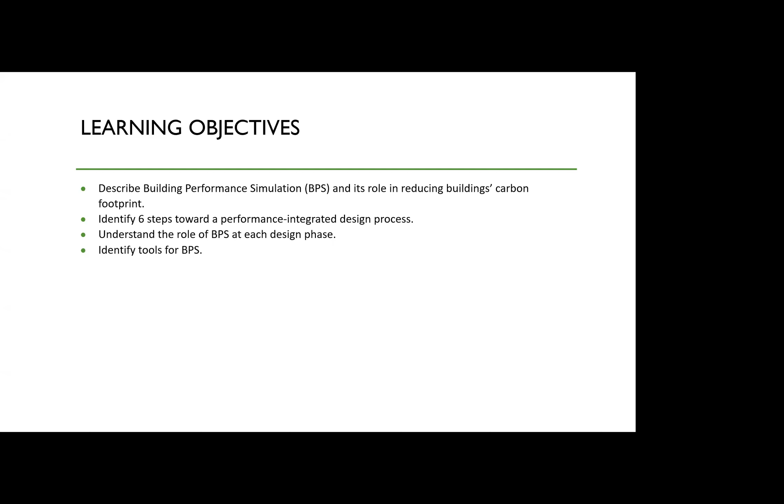Today's topic is about building performance simulation, and the learning objectives of this presentation is for the audience to be able to describe building performance simulation and its role in reducing buildings' carbon footprint. The audience at the end of this presentation will be able to identify 6 steps towards a performance integrated design process, understand the role of building performance simulation at each design phase, and identify tools for analysis.

So if everybody had a chance to answer the questionnaire, I would like to see the results. Laura, can you share the results with us? So we have 26% architects, 4% developers, and mostly we have energy analysts here, and also mechanical engineers, and some sustainability coordinators, and also from other professions. So I will try to speak somehow that it's digestible and understandable by all of our audience.

So let me start with talking about climate change. Climate change is one of the biggest issues of our days. Burning fossil fuel for energy releases CO2 into the atmosphere, trapping heat, raising the temperature of the planet, and causing massive changes to the climate and ecosystems. Buildings are responsible for about 40% of global CO2 emissions, which is the big chunk of the pie when you look at the global CO2 emissions.

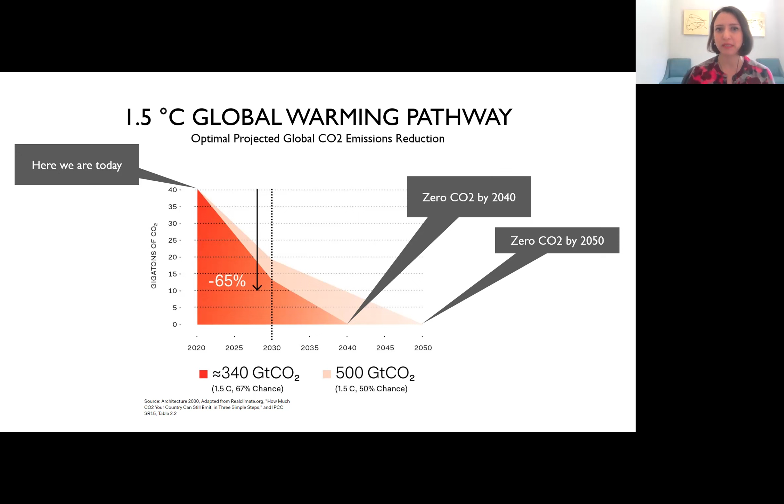So it is time for architects and design teams to take action. Architecture 2030 is a nonprofit organization that defined the 2030 challenge. This challenge requires architects to commit to reach carbon neutrality by 2030. And what that means is reducing fossil fuel energy use in all buildings, and then generating the remaining energy consumption and energy need of the buildings through renewable sources such as PV panels.

So let's talk about what goes wrong in architectural design and architectural practice that prevents designers from reaching carbon neutrality. There could be so many items and issues in the complex task of architectural design, like only focusing on the client's needs, forgetting about future generations, ignoring life cycle analysis, and focusing only on first cost, or just feeling disempowered. However, today I only want to focus on the design process.

The design process that does not include building performance analysis. So what is building performance analysis and simulation, basically? It is a set of computer-generated calculations that help designers compare design options and predict anticipated energy consumption of a building and its systems. It increases the ability to make informed decisions to improve energy performance and increase thermal and visual comfort, among all other design issues.

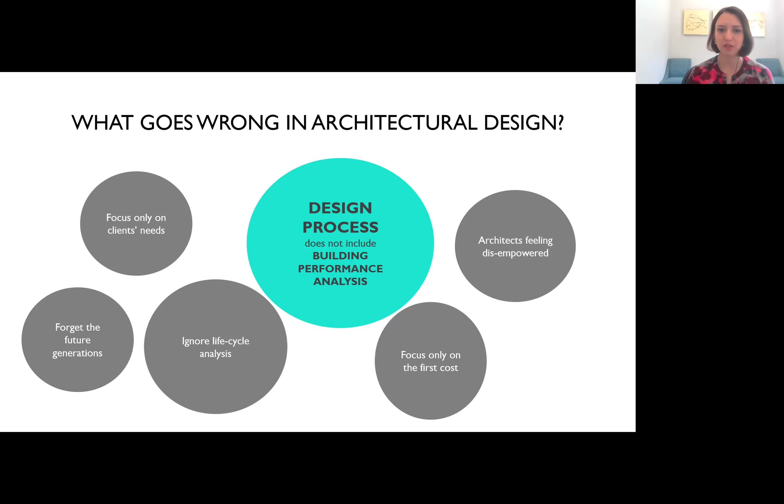Now, let's look at an integrated design approach where building performance simulation and analysis takes place along with the design phases, starting from conceptual design until schematic design, design development, construction administration, and occupancy. So this is an integrated approach where building performance simulation and analysis takes place at each phase.

When we start at early stages of design, we most of the time do some single aspect simulations. And as the design gets more evolved, we perform whole building energy modeling. The whole building energy modeling could start like a shoebox model, a simple, very simple box model. It can start at very early stages of schematic design.

So let's see what happens at each of these phases. Early investigation means setting goals, setting energy reduction goals, understanding the local energy codes, realizing what the requirements are, finding out about any possible incentives that you have locally. And also doing environmental analysis like climate and site analysis, massing and orientation, natural ventilation, solar shading, daylight glare, and envelope facade.

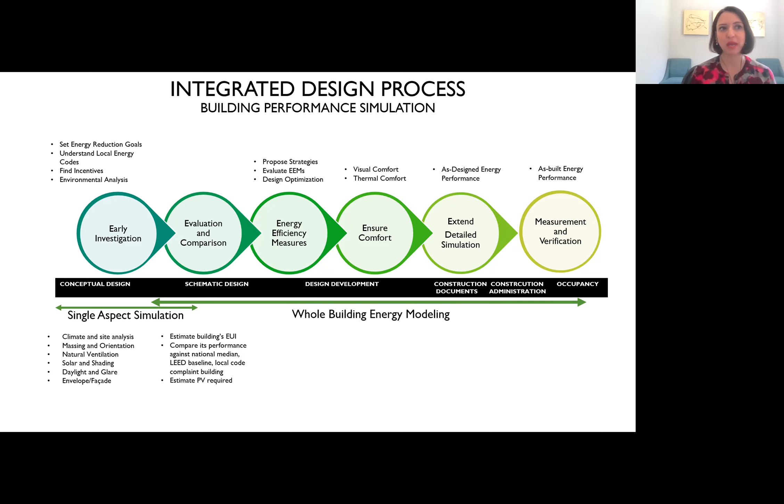However, in a typical design practice, this is what is happening. Rather than the integrated process, we do some kind of early investigation, early stage simulations, which are mostly done by the architect. We forget about building performance. We never talk about that with the design team.

And then we realize that we need compliance modeling, mostly for LEED or for code compliance, at the very later design phases, towards design development or construction documents. That is where the mechanical engineer or energy analyst gets involved. All the drawings are sent to him or her, and he or she is asked to create an energy model.

But we shouldn't forget that compliance modeling is not supposed to be predictive, is not supposed to be precise, to provide feedback for the designer. It is just showing that a minimum level of performance is achieved.

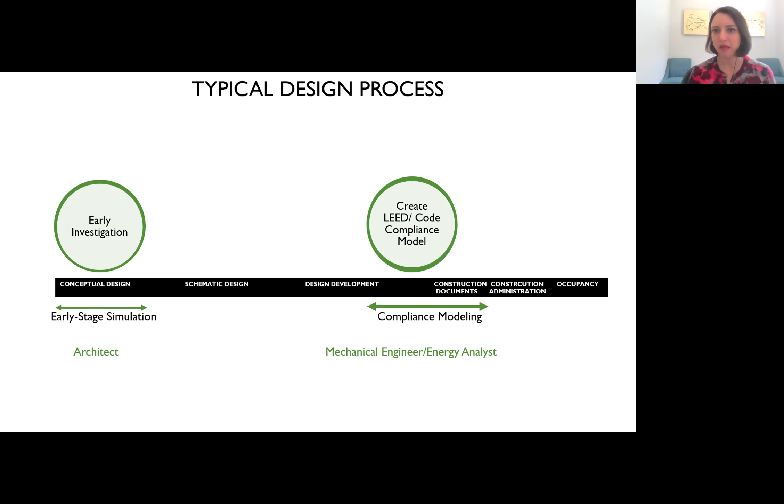So what's the problem with that? The problem with the typical practice is that we create a whole building energy model very late at the design phase, when it is too late to provide enough feedback, when it is too late to guide the design team.

So as you see in this graph, the yellow line shows effectiveness, and the dark blue line shows cost. At the beginning, we have high impact, low cost decisions. Making changes is easy, they don't cost much. However, at the later design phases, after design development and construction documents, any single change you want to make is costly. You have to change all the drawings, coordinate with all the disciplines, and it's super costly. So it's too late to make any changes.

So this practice means missed serious opportunities to reduce first costs, reduce operational costs, and reduce environmental impacts.

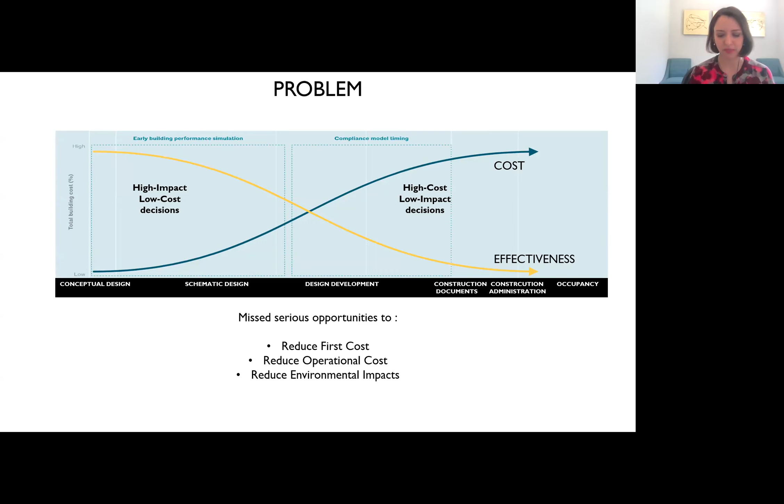Now I want to talk about analysis tools. The tools I am presenting, not all of them but most of them, are early stage analysis tools and whole building energy modeling tools.

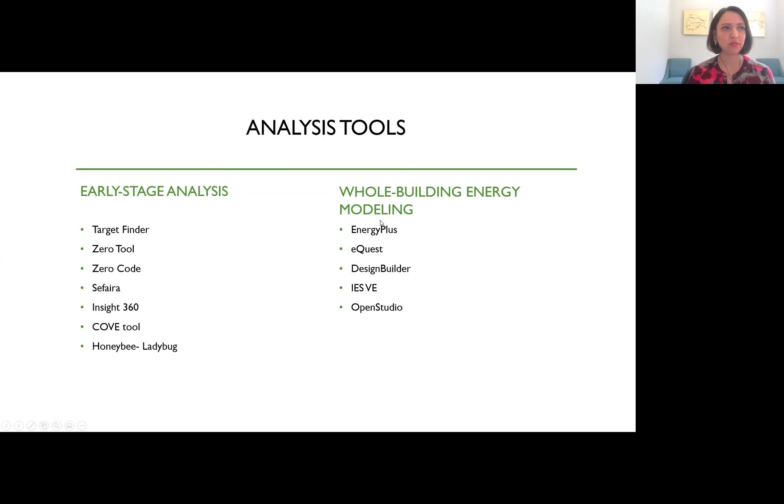Let's get started. Target Finder is very easy to use. It just needs to know the location of the building and the type of building. Then it will generate the EUI, energy use intensity, of a median commercial building in the US, showing you what the EUI is for a similar building with similar functionality to yours. So it's very good to set a target for the design.

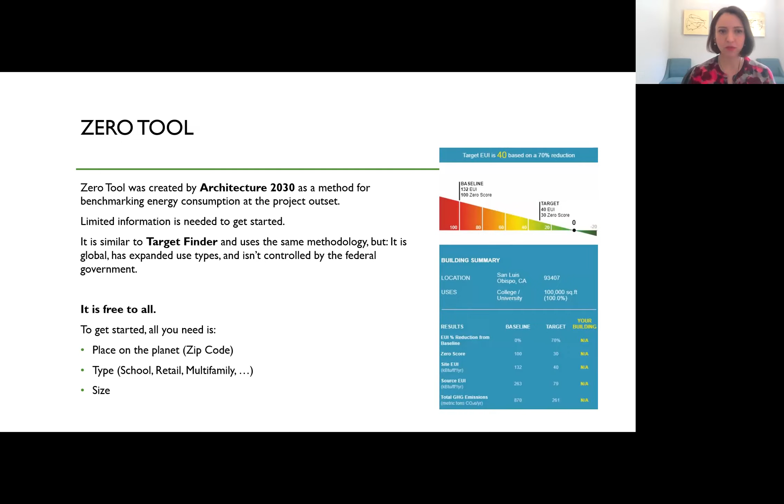Zero Tool is created by Architecture 2030. It's very similar to Target Finder. The only difference is it's global, so it's not limited to the US. It has expanded use types, with different building use types introduced in the tool, and it's not controlled by the federal government. You need the same information: just the zip code, the building type, and the size of the building.

The next one is Sefaira. It's a web-based, real-time early design analysis tool that integrates best with SketchUp, although it works with other software packages. It's very useful to look at different alternatives like the impact of orientation, facade, window-to-wall ratio, and shading on the design. Daylighting analysis is simple, and Sefaira also allows you to pick some mechanical systems.

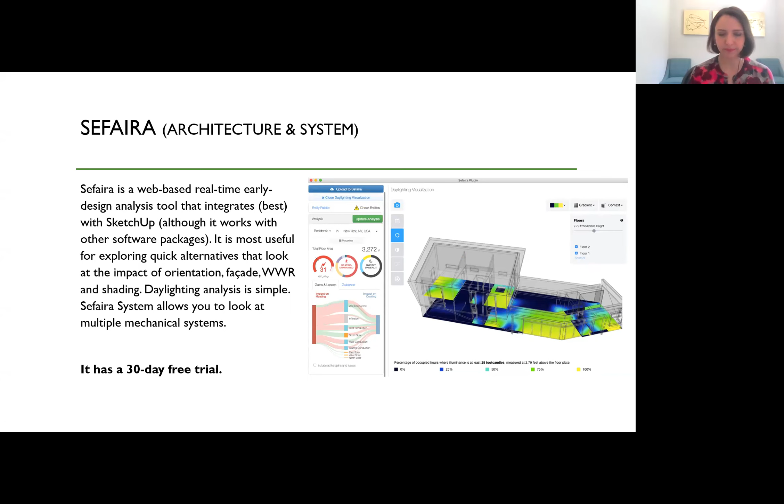Insight 360 is a cloud-based application for Revit, and it's free for Revit users. It's most useful for finding a building's approximate EUI, and looking at the impact of orientation, facade, window construction types, window-to-wall ratio, and shading. Users have a list of options to pick from, so you should pick the options wisely to get an approximately accurate result.

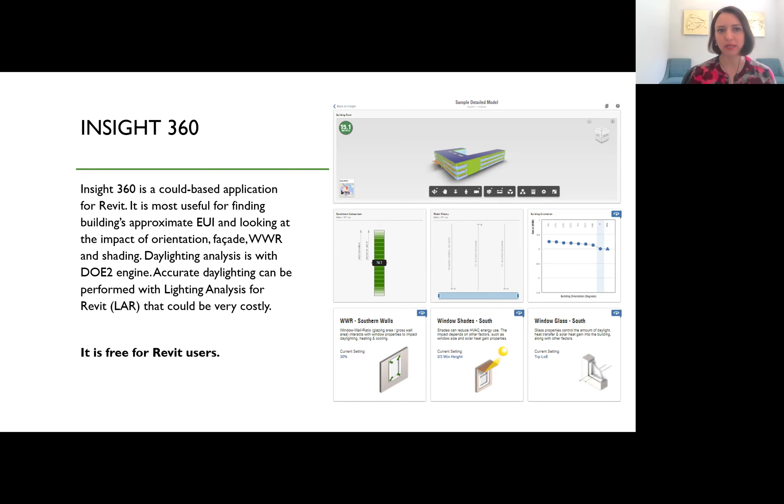Daylighting is not very highly accurate because it uses the DOE2 engine, but for doing more complicated, more advanced lighting, you can do it with LAR, lighting analysis for Revit, which could be very costly.

The next one is Cove Tool. It's again web-based and real-time, and it works with Rhino, Revit, and SketchUp. It has a wider range of performance analysis, including target setting, load profile analysis, and daylighting. It also has views and water analysis, which aren't found in the other tools, as well as energy analysis. They also added a COVID design feature, based on keeping a 6 feet apart distance, a neat thing that's useful too.

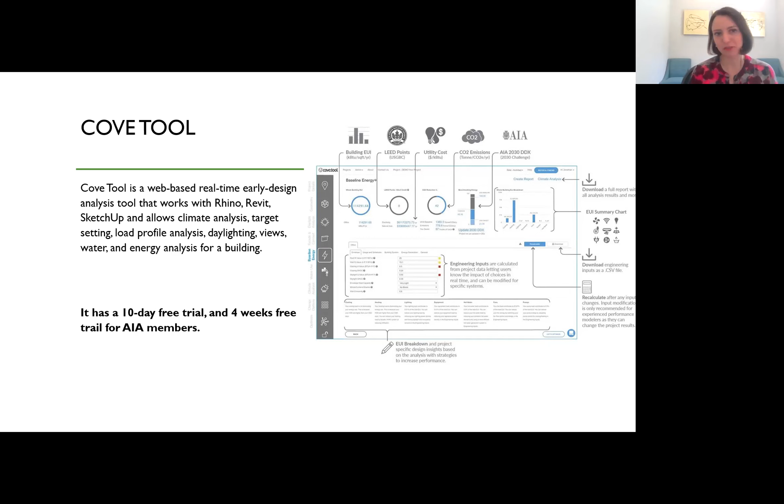Ladybug Honeybee tools are my personal favorite for doing early stage analysis, because of their flexibility and the possibility for the user to adjust, maneuver, and change parameters to see what is actually going on in the program. It comes in the format of Rhino plugins, and the tool is also developed for Dynamo for Revit, but it was originally created for Grasshopper and Rhino. It uses two very strong, powerful engines: Radiance for daylighting and Energy Plus for energy modeling. It's capable of doing many different kinds of environmental analysis, and it's free.

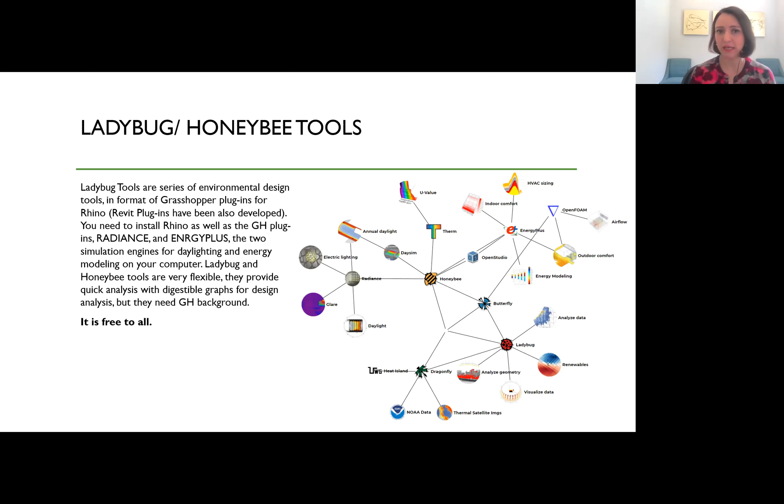Energy Plus is the DOE's fundamental energy simulation tool that has been funded, and it continues to get funding for development of capabilities. Energy Plus is not very user-friendly, and it has originally been used by researchers.

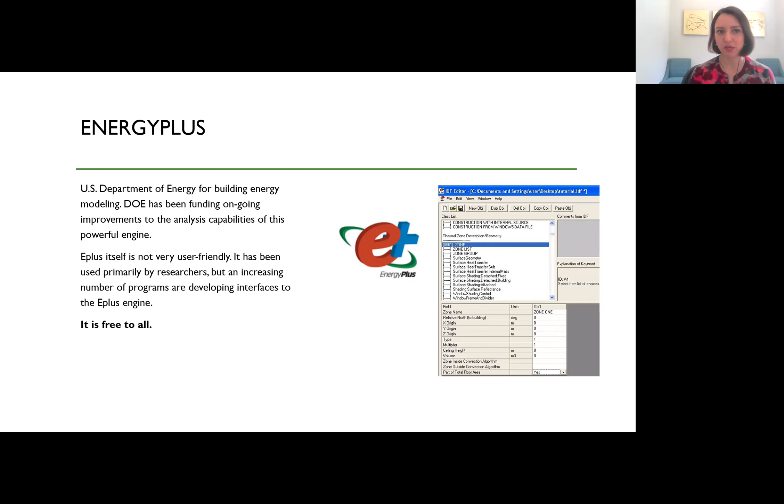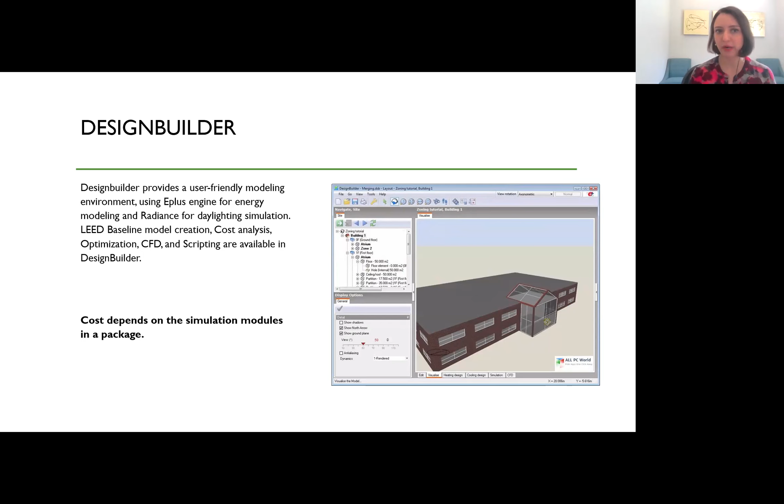But an increasing number of programs are developing interfaces to the E+ engine. One example is Design Builder, a very user-friendly modeling environment that uses the Energy Plus engine. It also does daylighting simulation with Radiance, creates the LEED baseline model, and does cost analysis, optimization, CFD, and scripting. The price depends on the number and type of modules that you purchase.

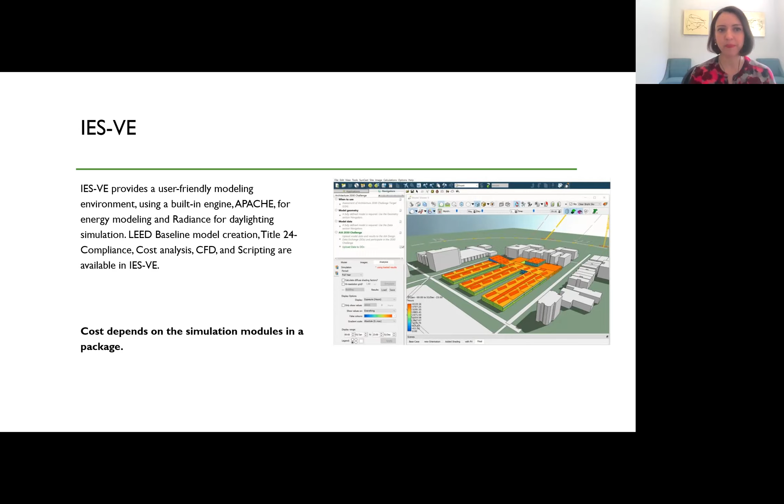IES is relatively similar to Design Builder in terms of its function. It provides very advanced whole building energy modeling, using its own built-in engine, Apache, for energy modeling, and Radiance for daylighting. It also creates the baseline model and Title 24 compliance, which Design Builder doesn't do. It also has cost analysis, CFD, and scripting, and it is relatively pricey, with the price depending on the modules that you want to use.

So now I would like to have a brain break and ask you some questions. I want to know if you have used any of the tools that we discussed, and a few more that I didn't elaborate on here, and whether any of these tools have worked well for you.

Please respond to the poll. We have three questions here. The first one is about the tools. The second question is, do you use any other tools for building performance analysis? If so, let me know what other tools you use and are happy and satisfied with.

The next question is, do you support the integrated design process? Strongly agree, somewhat agree, strongly disagree. If you want to provide more explanation, please use the chat box, because I really want to know what you think about this integrated design approach. I also wanted an open-ended question to know what you think is an impediment to reaching that integrated design approach, but I'll read the chat box later once you've all responded.

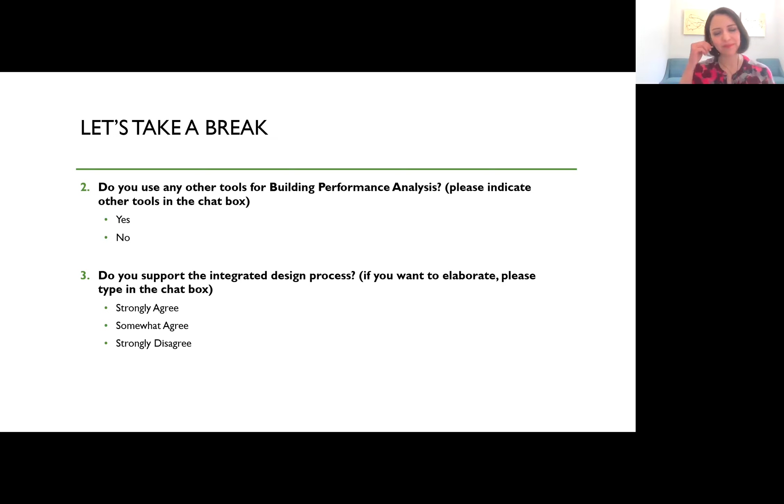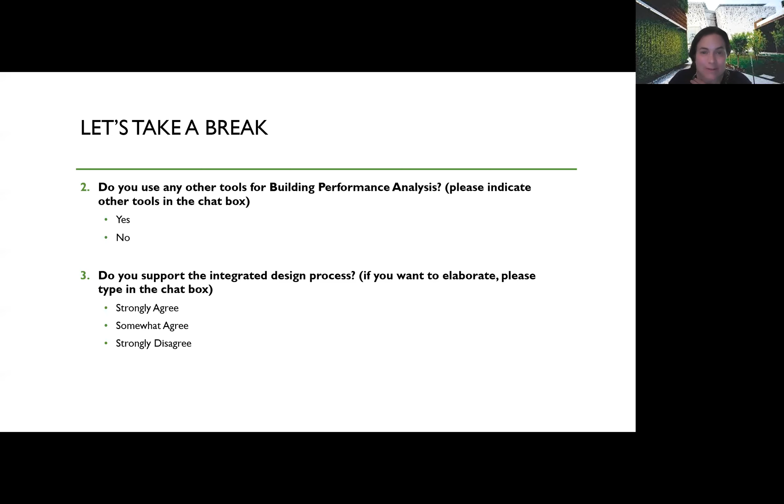Somebody mentioned in the chat that you forgot IES, but there were only a certain amount of potential answers, so that was the last one on the list and it didn't fit in. If you use that, please share in the chat. Oh, in the poll? Oh, I got it. Sorry about that. Oh, no problem, the limits of technology. If you have not finished it, go ahead and finish so we can launch and get an idea of how many people use which tools.

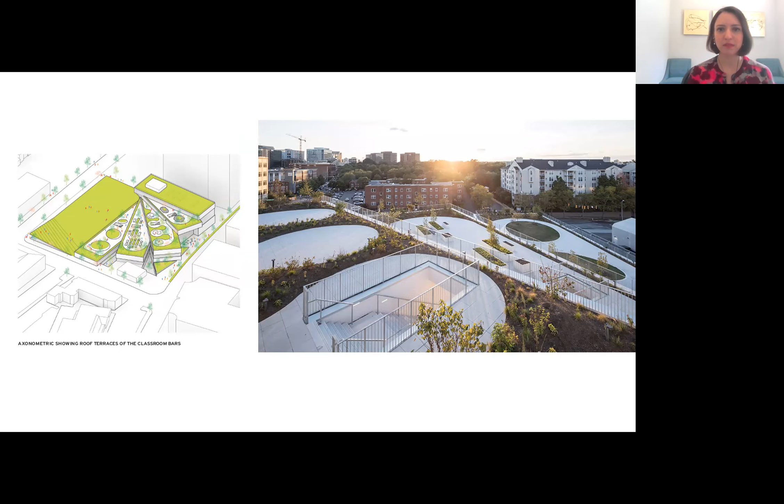The very first stage of the design was massing study, and the architect was thinking about all the different massing options that could possibly be created. They wanted to know the energy consumption impact of different massing options. So what I did was summarize and categorize the many options they gave me into 16 categories, and create some prototypes and simple configurations to represent a group of the options presented to me.

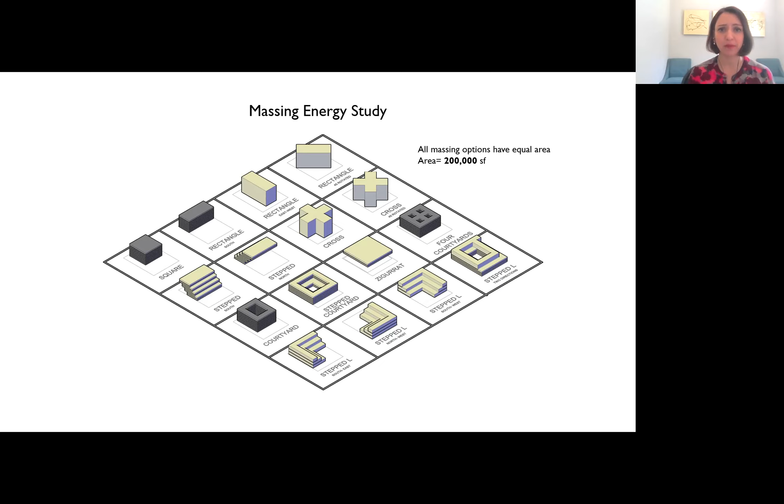The criteria I had for creating all these options was to keep the area at 200,000 square foot. So I created an energy model for each of these 16 options to understand the heat gains and heat losses for each. As you see here, different configurations have different heat losses and heat gains.

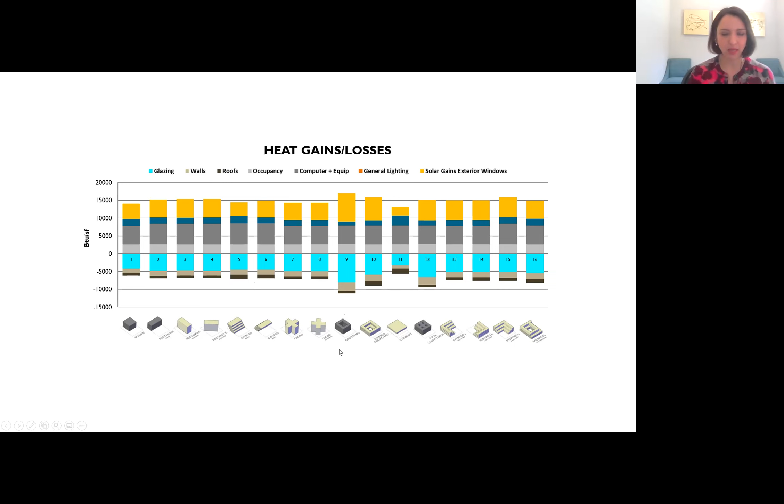The other aspect I looked at was energy consumption—heating, cooling, and lighting energy—only looking at those three categories to see which options use less energy. The most efficient design was a simple square building and a simple rectangular building. But neither the architect nor the client were interested in those simple options. They just wanted to build something unique and amazing.

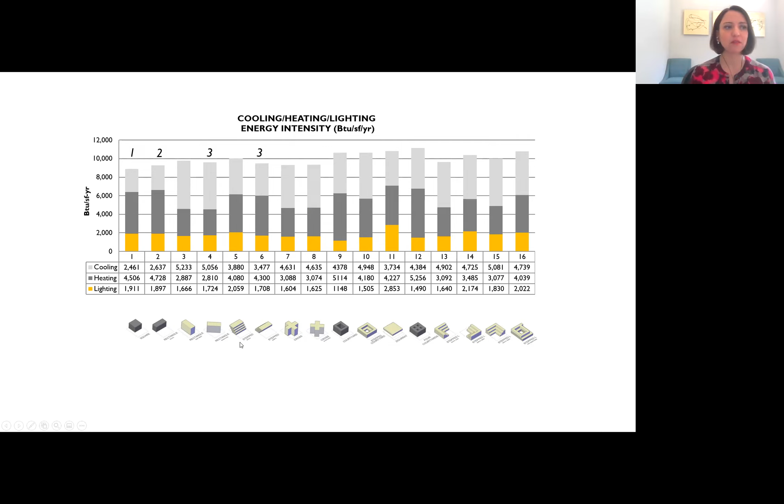So the third option was the stepped rectangular floor plates towards south and towards southeast, and that was the beginning of the time they started thinking about those stack of buildings.

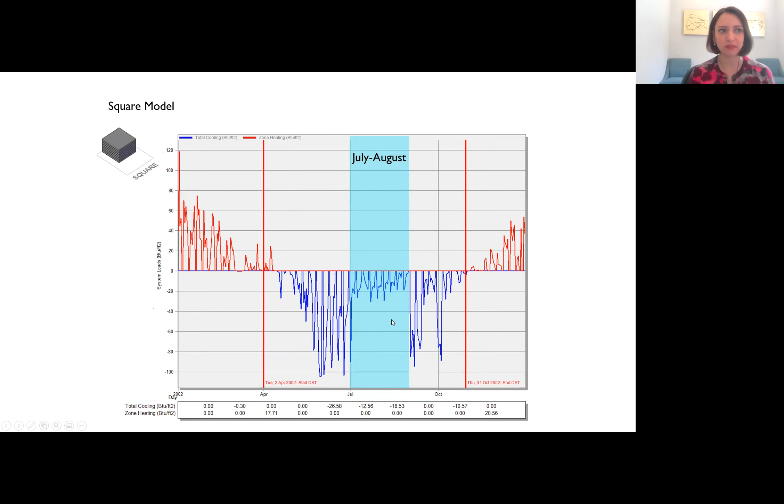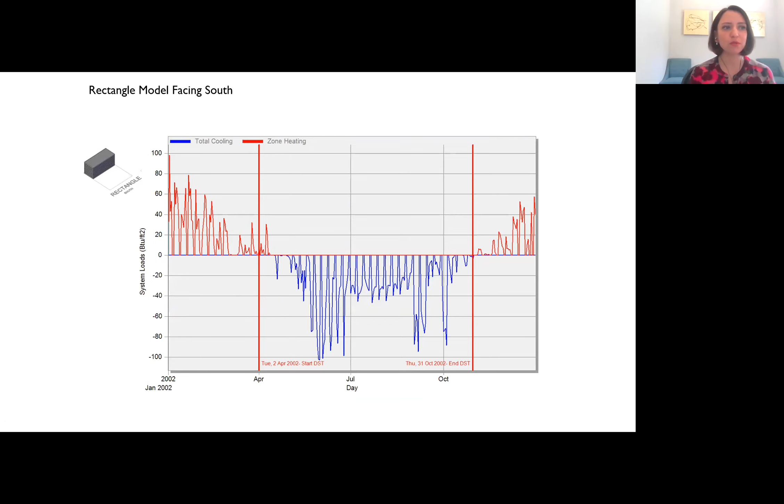At the same time, I was looking at the annual profile to see when heating and cooling energy is consumed, and I paid attention to the summer closure of the school. In summertime, the building is not occupied, so it doesn't have a lot of cooling energy—just thinking about how the loads look like at every single day in a year.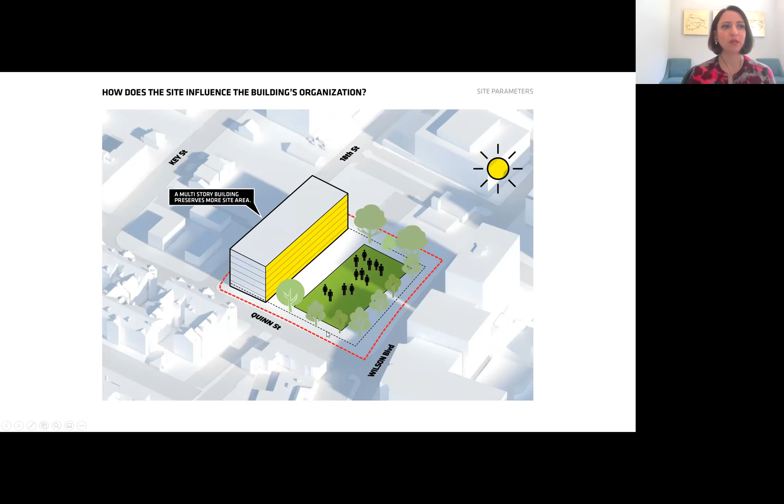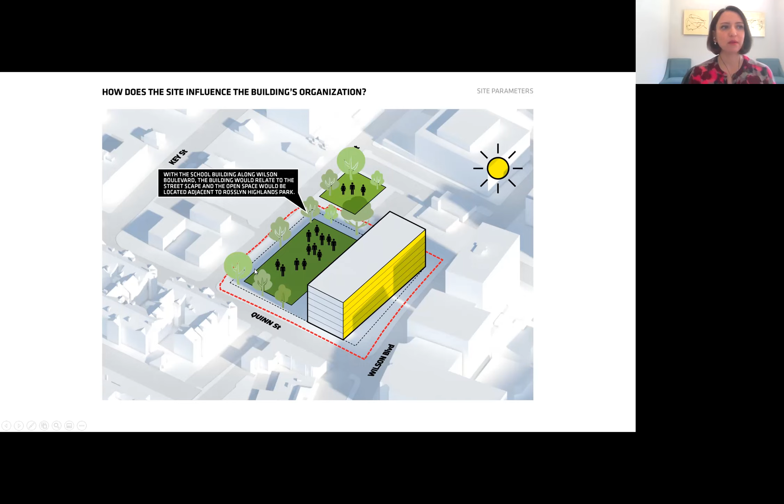If the building is located at the back of the site, they would have an open space for the students to enjoy more open area. If the building was located on Wilson Boulevard, they would have more enclosed space, quieter space, more enclosure.

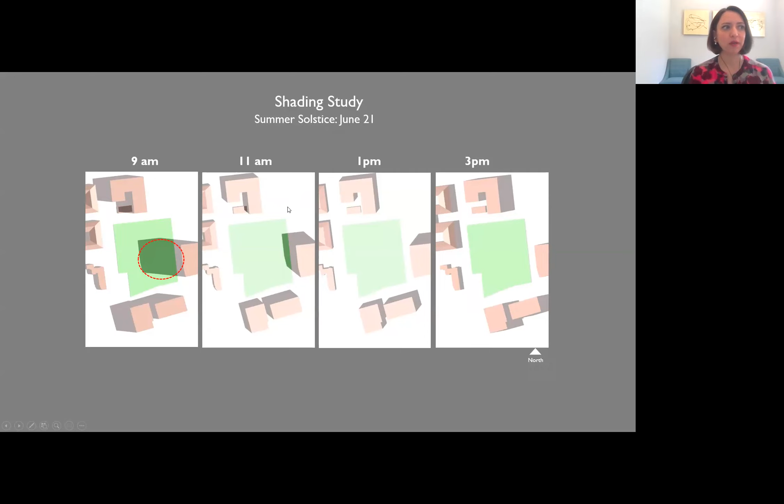What I provided for them was shading analysis to look at three time steps: summer solstice, equinox, and winter solstice, at 9 a.m., 11 a.m., 1 p.m., and 3 p.m., since the school operation is mostly in the morning. So what the shading analysis showed was that...

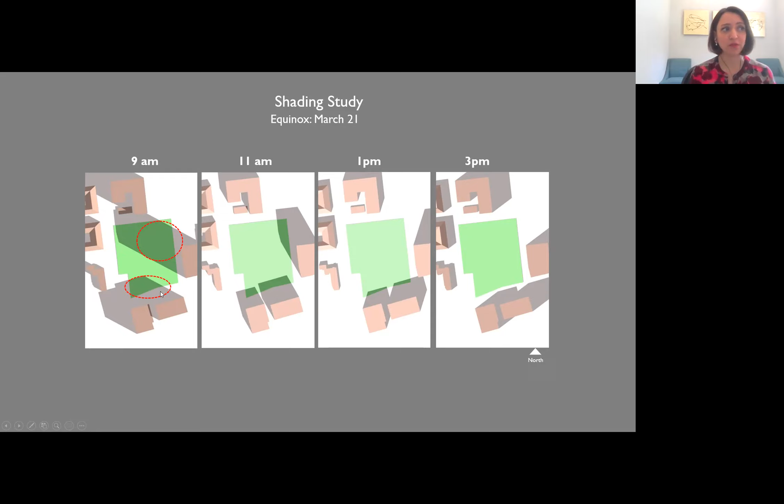The site was mostly shaded by the neighboring buildings because they had two tall buildings in the south and one on the east that was casting shade during the morning hours, which is when the kids are mostly in school.

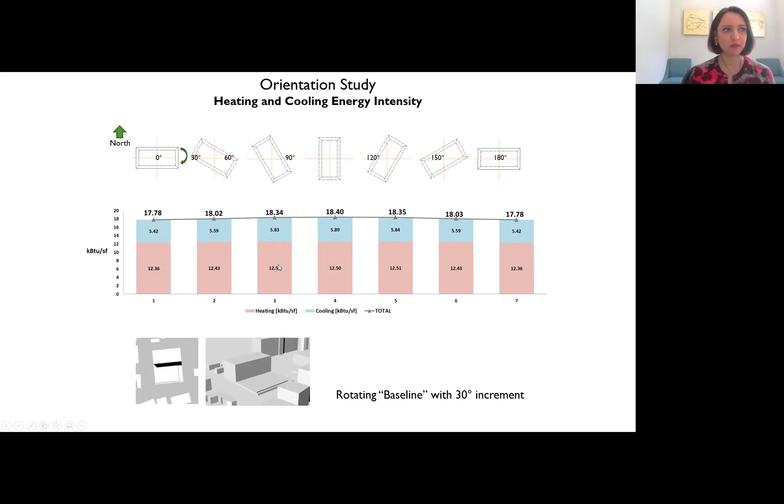The other part was orientation study—trying to rotate the building by 30 degrees and finding out the energy consumption. If you look at this graph, you might say there is less implication on the total EUI, but if we zoom in, there's about 1 EUI difference when we have the building in the optimized position, which is north-south to east-west.

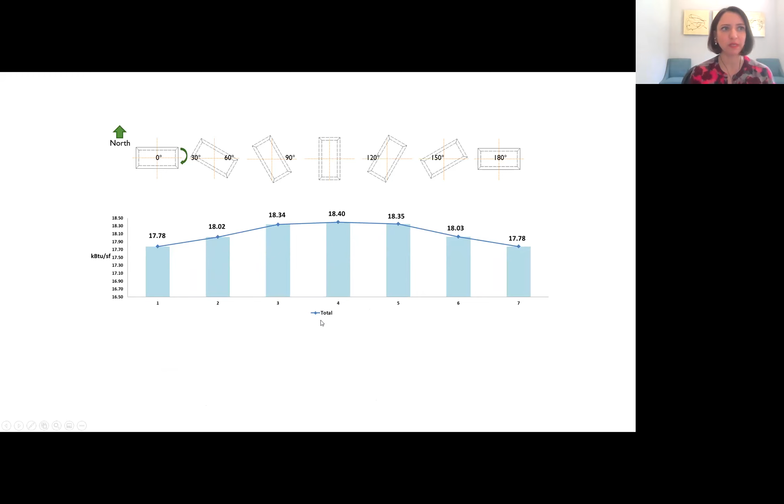Even 1 EUI is very important for us in those high-performance buildings, because we don't have such a high EUI—it's just 18 EUI. So even capturing 1 EUI is important to us.

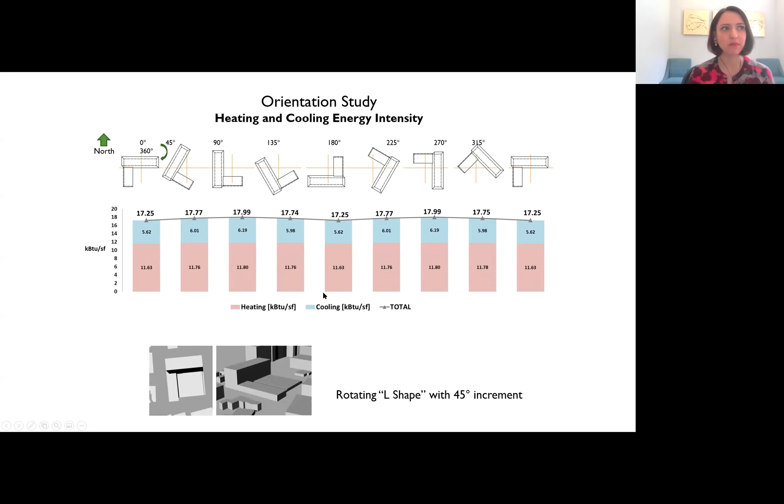In more complicated shapes like L-shape or just bars and other forms, it's not straightforward, but it's important to just model them, simulate them, and see what the implications are. So after many discussions with the design team, the architect, the school board, and the community...

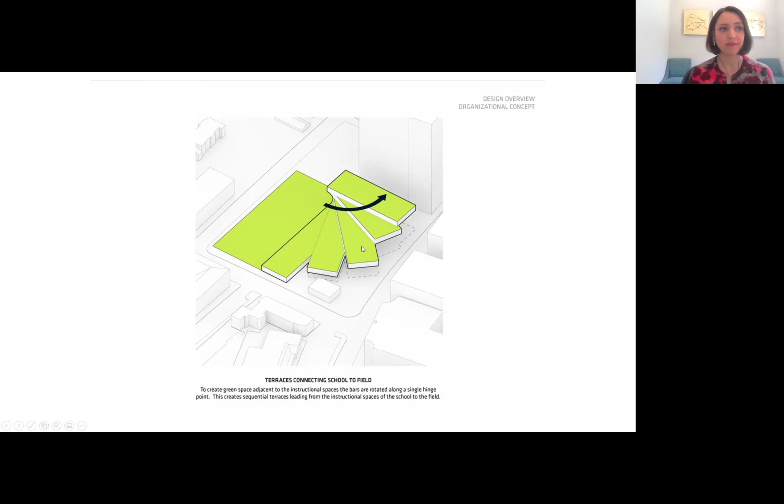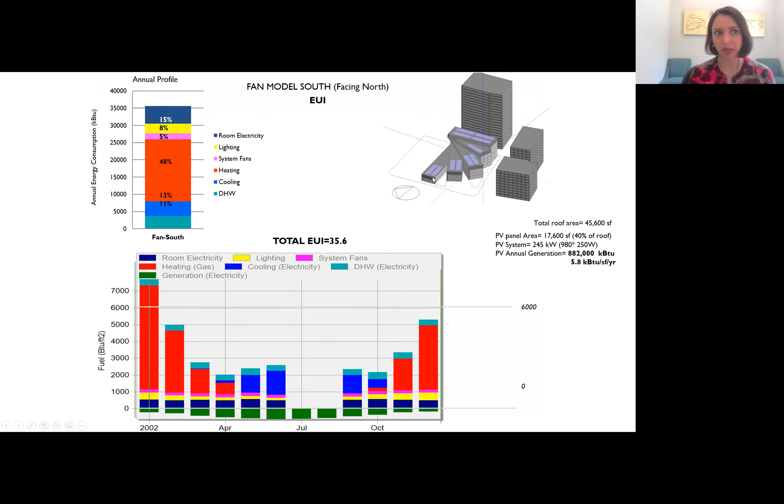...the parents, and all the involved people in making decisions, the architect decided to have the fan shape model, and they asked me to find out if it is more beneficial in terms of energy reduction to have the building on the south or the north side of the site.

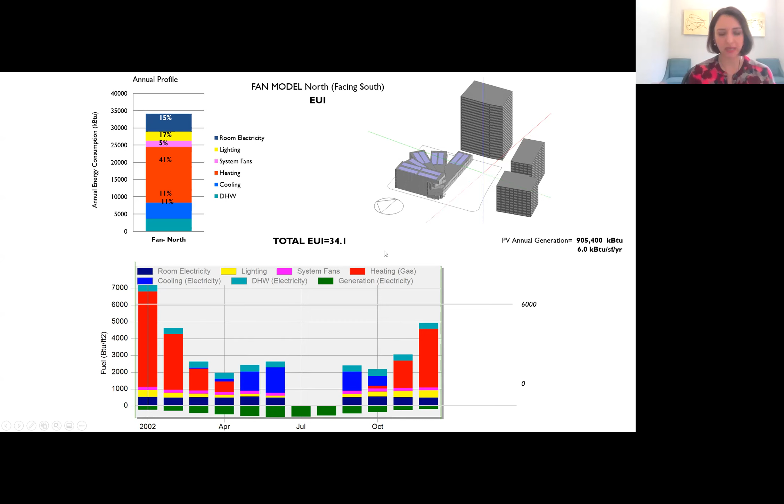As you see here, this is when the building is located on the north part of the site facing south direction, benefiting from the special configuration it has and having exposure to the south, using daylight and the south exposure while avoiding the shade from the neighboring buildings I presented before. So that would save another EUI.

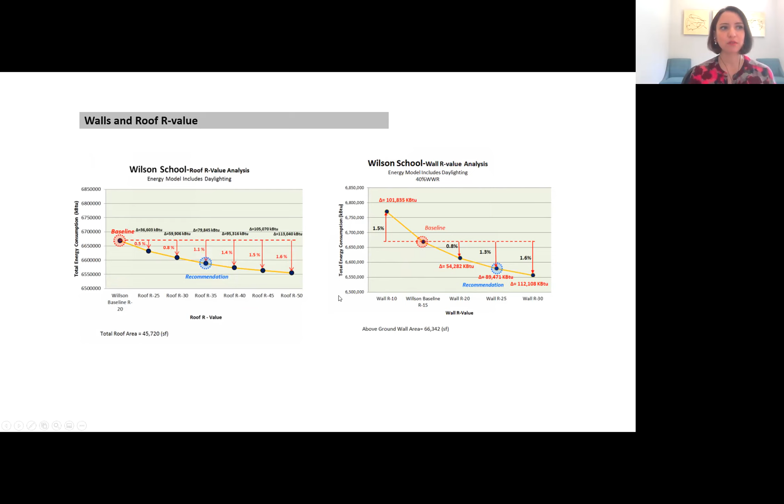Parametric analysis was constantly happening. It was an ongoing process, thinking about the walls and roof R-values and making recommendations based on the amount of energy saving that we have, and also looking at the cost of each inch of insulation that we add to the walls and roof compared to the energy reduction that we have.

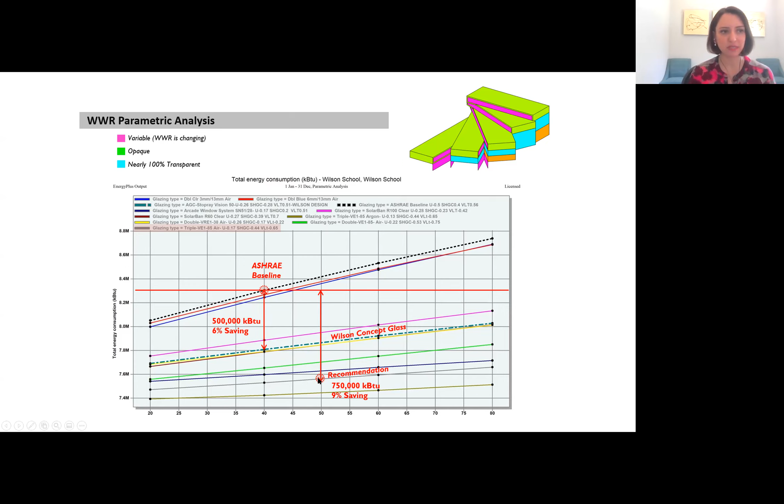But the other parameter I looked at was using different glazing types. So now each line is plotted for a different glazing type used in the building. The takeaway from this slide is, if you want more window to wall ratio, which is interesting to all architects, you have to pick a higher performing glass, and this type of graph would help the architect choose the glazing type based on the amount of saving they want to reach.

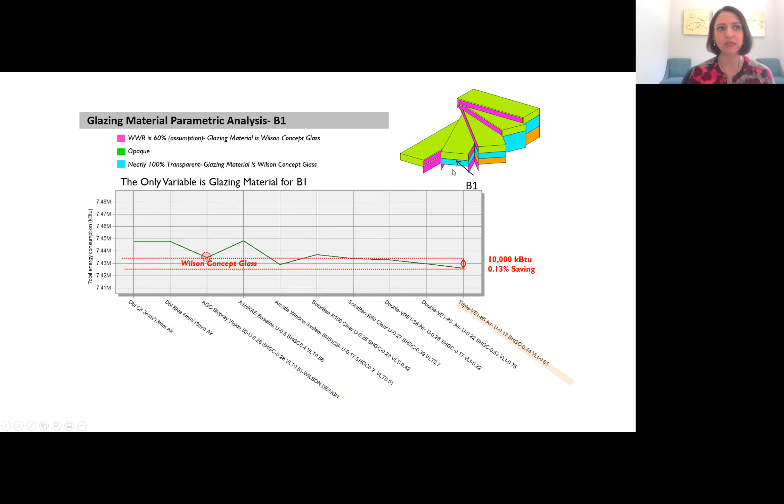This slide also shows different glass types for each orientation, because of the complexity of the building configuration. The design has many different orientations, and I looked at different glazing types for each of them to find which glazing type is more appropriate for each orientation.

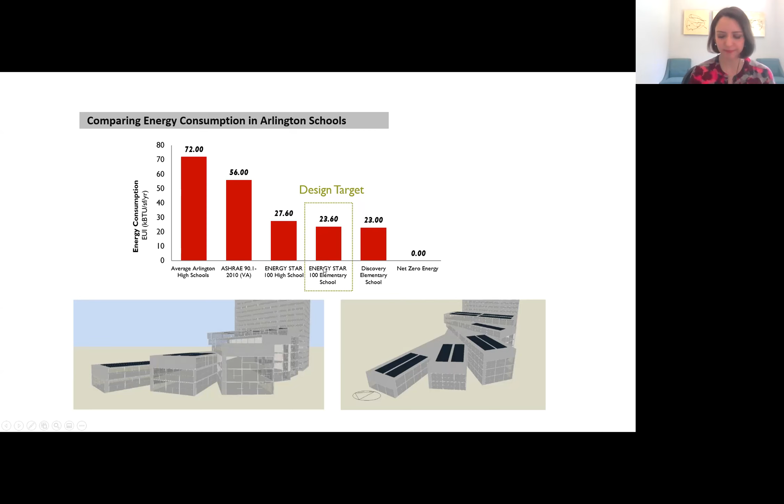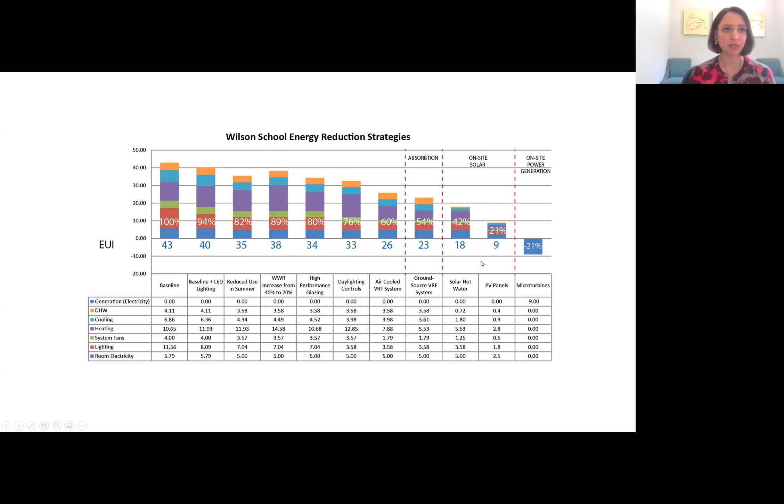During the design process, with all the energy reduction strategies, we tried to reduce energy consumption by implementing different strategies, and also by creating on-site solar. We proposed to reach zero net energy for this building.

The second example is the DGS O Street building. This is an office building located in downtown Sacramento, designed by ZGF and Lionakis. MEP and energy was provided by Glumac, the firm I was working for while involved in this project. It's an 11-story building, 372,000 square feet, with very stringent goals: zero net energy, LEED version 4 platinum certification, and a maximum EUI of 25 kBTU per square foot per year.

With an integrated design process and by incorporating incremental improvements to a very sophisticated energy model, we were able to achieve and exceed those goals. At the end of design, the EUI was 24.8 kBTU per square foot per year, source EUI was 75.6, and we could reach the maximum 18 points for LEED. ZNE was also pursued by using the SMUD Solar Shares program.

This is a program offered by our local utility, SMUD, in Sacramento. It offers the Solar Shares program where building owners enter a contract, and SMUD provides them clean electricity generated by neighboring solar farms in the area.

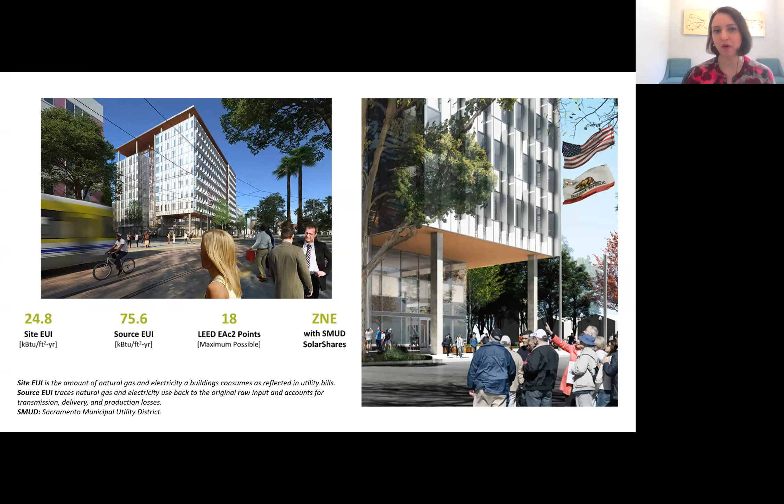Now I would like to talk about the initiatives taken at each of these phases throughout the design. Starting from early investigation, the team started sustainability charrettes, workshops with all the team members and the owner. The important task was to set goals, and as I said, this building had a target EUI of 25.

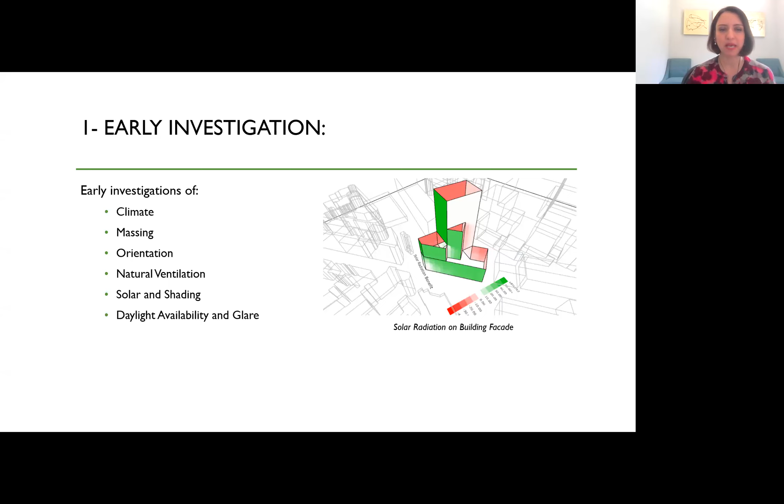Learning about the local code, which is Title 24 for us here in California, and finding out possible incentives. Some of these incentive programs need a certain level of performance, so knowing that level and pursuing it made it possible to use those incentives. Early investigation also covered climate, massing, orientation, natural ventilation, solar shading, daylight availability, and glare.

The second part is evaluation and comparison. This is when we create a whole building energy model, a simplified model, just to know the EUI of the proposed design. In this building, by early analysis thinking about the EUI at a very early stage, we understood that the building needed to be 34% more efficient than Title 24.

Our California Title 24 is pretty stringent, so being 34% more energy efficient than that, we knew at the beginning that this was going to be a really tough task to do.

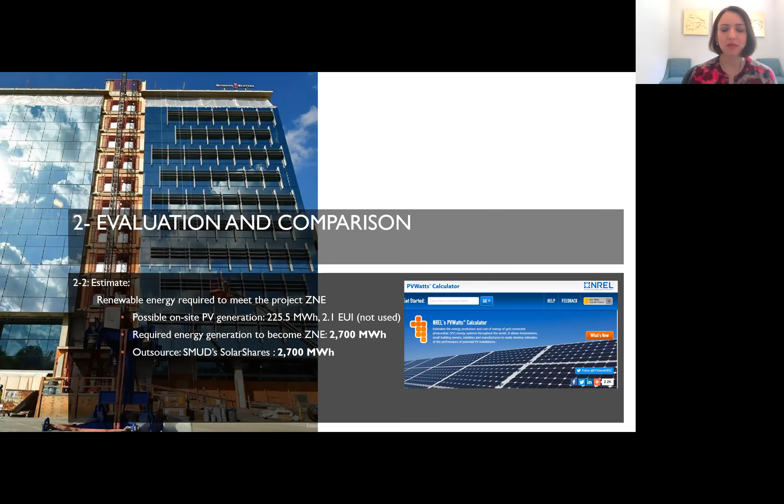The other part of the evaluation and comparison stage is thinking about generation, how much generation you could have on the site and how much you need to outsource. For example, for this 11-story office building, there was no way to generate all the energy need from on-site PV because the roof is not enough to generate the whole energy consumption.

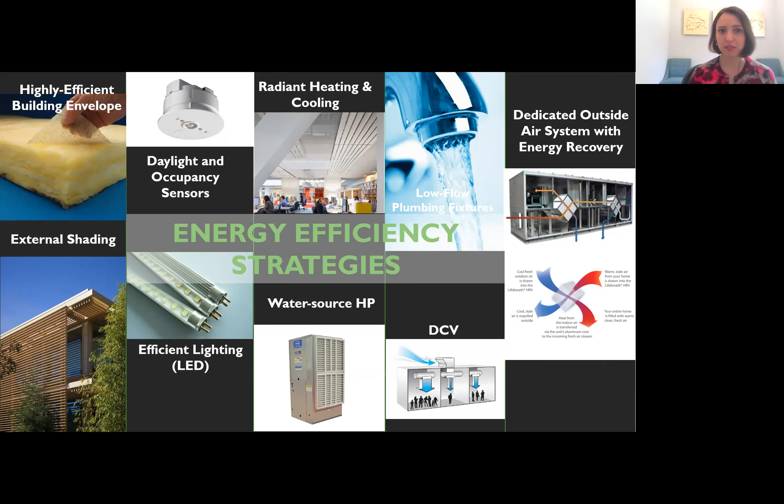The third step is energy efficiency strategies. In this project, these included having a highly efficient building envelope, using external shading, using daylighting, daylight and occupancy sensors, very efficient LED lights, radiant heating and cooling, water source heat pump, demand control ventilation, low flow plumbing fixtures, and a dedicated outside air system with energy recovery.

At this step, when the design is getting further developed, I created an energy efficiency measures list so that multiple design options were created, analyzed, compared, and contrasted against each other. This type of EEM analysis allows optimization of the design via comparison while managing construction costs.

So in front of each of these simulation iterations, energy savings, operational cost savings, first cost, potential incentives, simple payback, EUI, and CO2 emissions were presented when calculated. Having all that information for each single iteration allows the owner and design team to compare these options and choose a bundle of the options that make sense for the whole design team, which is really important and crucial.

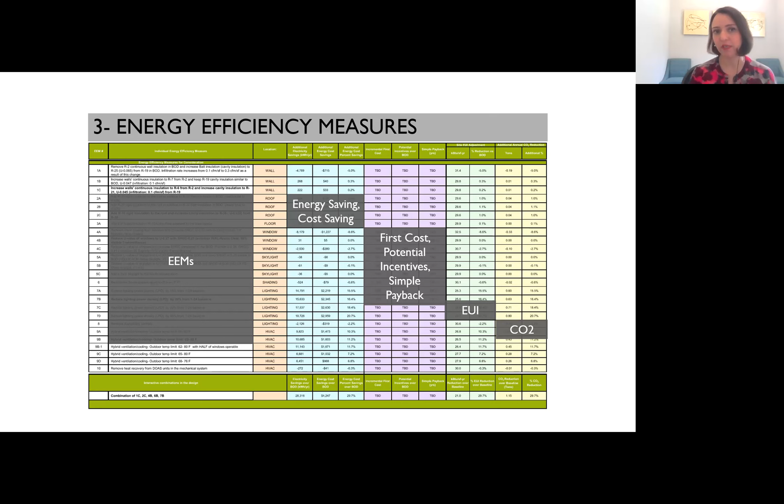The fourth step is ensuring comfort, thermal comfort first. By design development, the spaces are getting shaped and figured out. For some spaces that were concerning for the design team, we did thermal comfort analysis to see how the operative temperature, which is the average of mean air temperature and mean radiant temperature, changes over time, how occupancy plays a role, and whether occupants doing a certain task feel comfortable.

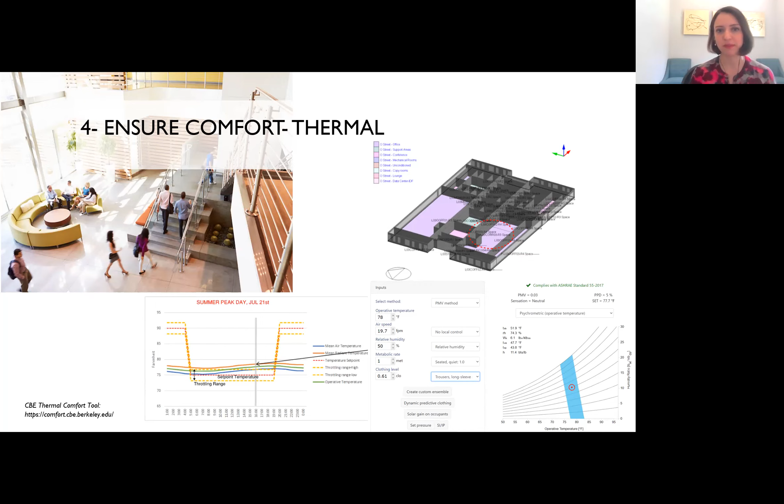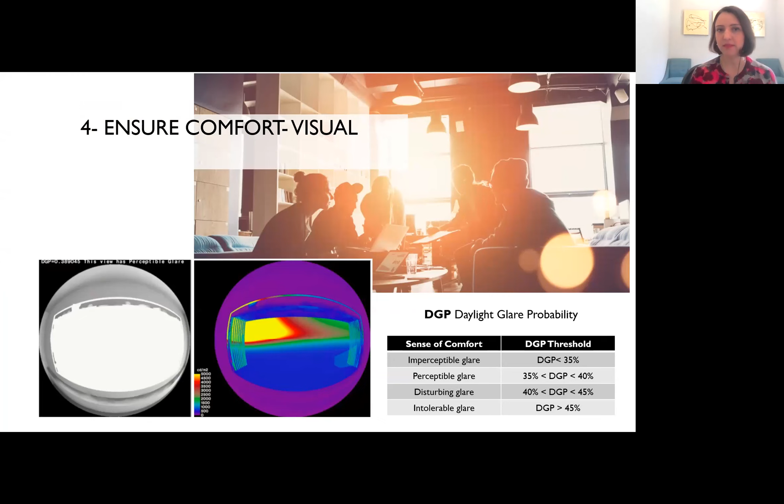Also visual comfort, making sure that glare is addressed and minimized in all the spaces.

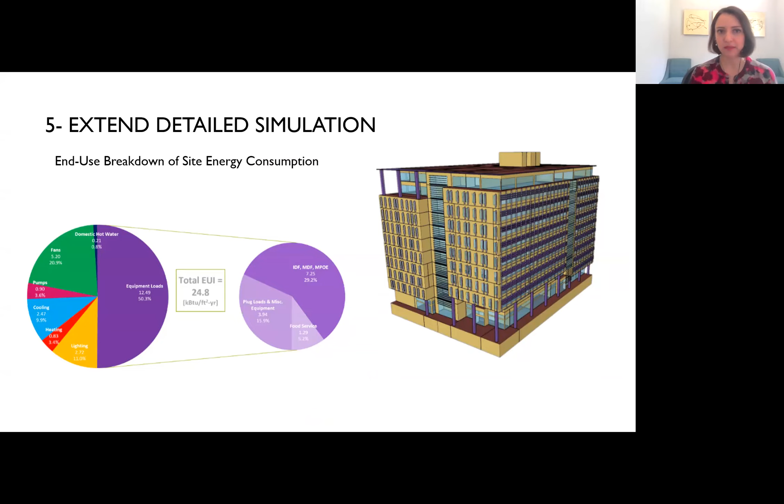The next step is extending the simulation, getting more details into the energy model, adding all the building systems and details, and creating an energy model that includes all that information.

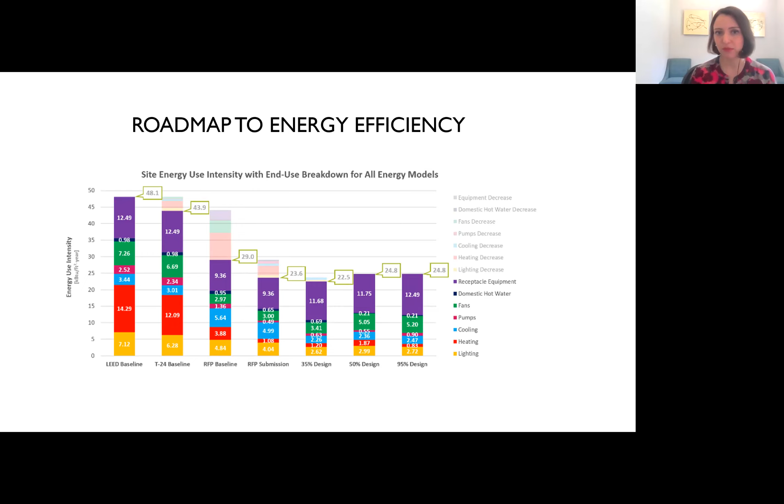This is what I call the roadmap to energy efficiency. It shows how we started from the LEED baseline to Title 24, across all different stages of design. As these different chunks of each energy use type changed, we made sure the target of less than 25 EUI was pursued during the design, and it wasn't an easy task.

The next step is measurement and verification. During design, we can create a measurement and verification plan to specify the type, location, and quantity of meters needed to collect enough data to prove the building operates as designed - how many meters, where they should be located, and what kind, so we can measure the building and compare it with the energy model once occupied.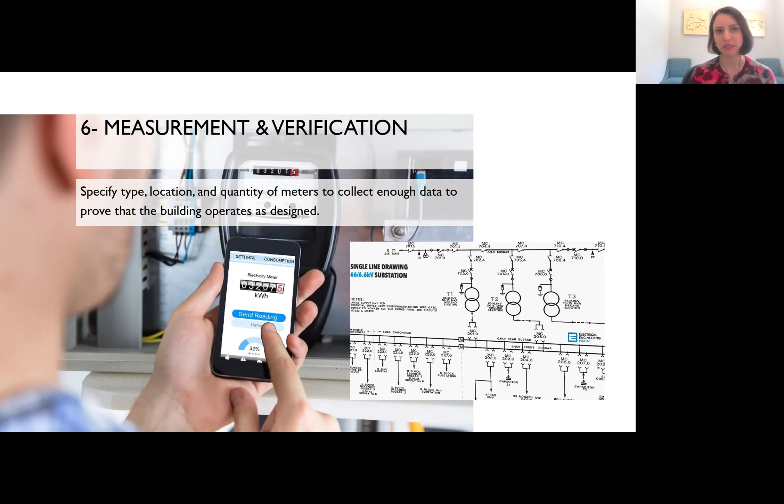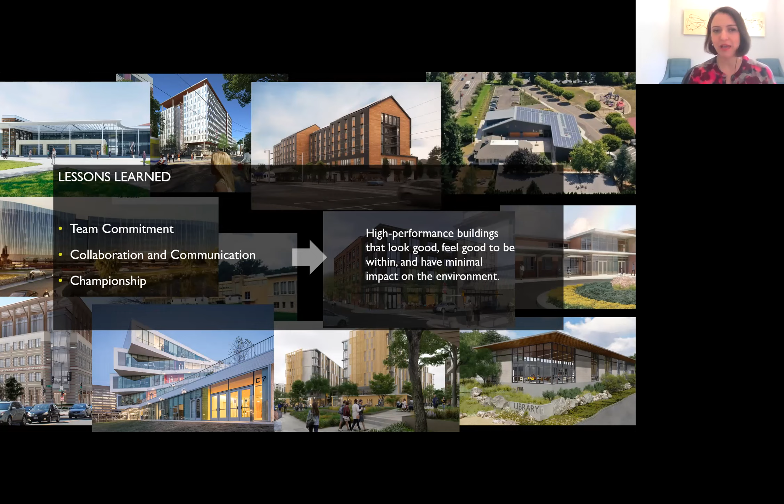And now I would like to open it up for questions and answers and see if there are any questions that you have. I would like to ask Laura to let me know if there are any questions.

Thank you so much, Ladan, for a great presentation. If you have a question, feel free to use the chat or unmute yourself and just speak up.

And while we're waiting, there's a couple of questions in the chat.

Why should we continue to use eQuest, which is a 20-year-old program with many deficiencies like modeling of humidity or internal radiation? We don't have to use eQuest. I know that I do not use eQuest. I know that some people use eQuest because it's just easy to use. The engine used in eQuest is DOE2, which is the grandfather of EnergyPlus. Although it's outdated, many consulting firms still use eQuest for energy modeling. I think it's just the fact that it's easy to use.